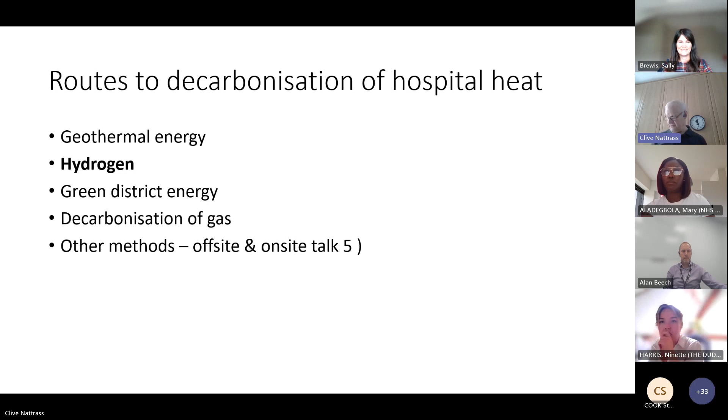So this is part of the program. There are several routes to net zero: geothermal energy, heat from earth, hydrogen, which you'll hear about in a minute, green district energy rather than not green district energy, and then some other technologies which we'll cover next week. So this one's the second hydrogen talk. First one was about Hynet itself. This one's more national.

So I'm going to first show you this map just to give you some background. The green bullseyes are sources of hydrogen on their way. Most of them aren't there now, but they're coming, sources of green hydrogen. You'll see them sprinkled around the country. So the northeast, Hull, Norwich, a little bit around London, not much. And the northwest, Hynet is there.

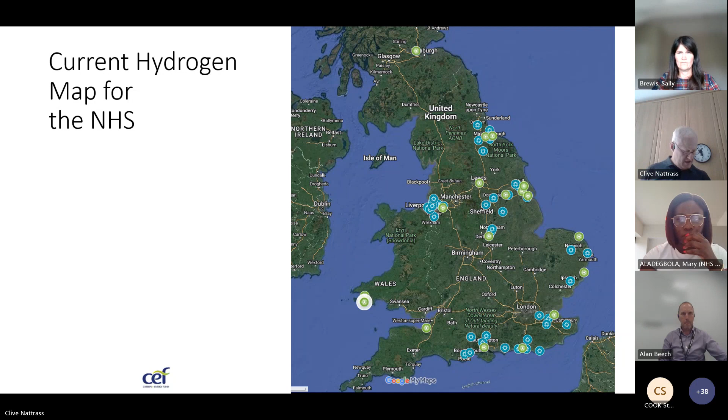And then the trusts that we've identified as being within the reach of hydrogen in the shorter term, maybe in the longer term everybody will get hydrogen, but in the shorter term, are the blue dots. So there is a lot of potential sites that could use this as part of their net zero plan. So I'll go on to Sally, who will talk you through the hydrogen piece.

Thanks very much, Clive. Just before I start, could we have a bit of audience participation, please? We've got 44 people in the call. Could you please raise your hand if you've not seen me talk about hydrogen before? Well, it's a scurrying of mice there, Sally. There you are. Keep going. Any more? It's quite important, just so I know where to pitch it. Sounds like around half of the people haven't heard from me before, so that's really helpful. Thank you very much. You can lower your hands again.

I'm Sally Brewis. I'm head of regional development at Cadent for the Eastern region and North London. We also cover the Northwest and the West Midlands. I'm going to talk to you about hydrogen for Cadent and our regional programme. So could we go to the next slide, please? We cover around 12 million supply points across the Northwest, the Midlands, the East of England and North London, 132,000 kilometres of pipeline.

And our ambition as Cadent is to repurpose our networks to hydrogen. We think that's the best option for green gas, and it can be made at scale in a low carbon way. So any hydrogen going into our repurposed network will be low carbon and subject to the government's low carbon hydrogen standard. The approach we're taking is to focus on industrial, commercial and public sector organisations first, while we await the decision from government on whether hydrogen will be used in our homes or not.

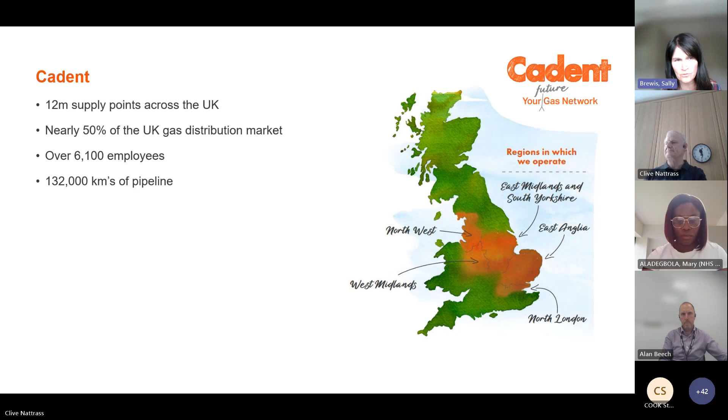Next slide, please. The government is very supportive of establishing a hydrogen economy in the UK. They see massive potential for economic growth through this new industry, and they want us to be a leader in the hydrogen economy. Consistently over the past few years, there have been lots of different strategy documents, all of which state hydrogen as having a role, in particular for heavy industry, heavy transport, flexible power generation, and also potentially for residential decarbonisation.

There are two things I want to highlight on this slide. I've already mentioned the low carbon hydrogen standard, which will mean that any hydrogen that goes into the network will be low carbon, whether it's made from electrolysis or from natural gas with carbon capture and storage.

But the other really important thing on this slide is about the hydrogen production business model. Just in the same way as for the last 14 years, government have been subsidising offshore wind to get that technology off the ground, to bring prices in generation from offshore wind down. They've used a contract for difference mechanism for offshore wind, and that is the mechanism that they are proposing to subsidise hydrogen. Cost of producing hydrogen is high now, but it will come down over time.

And what government wants to do is make sure that the price the end user pays for low carbon hydrogen is as close to natural gas as possible. So that production business model is very important when you're thinking about how much the hydrogen might cost your organisation in the future, if that's the route you choose to decarbonise. Next slide, please.

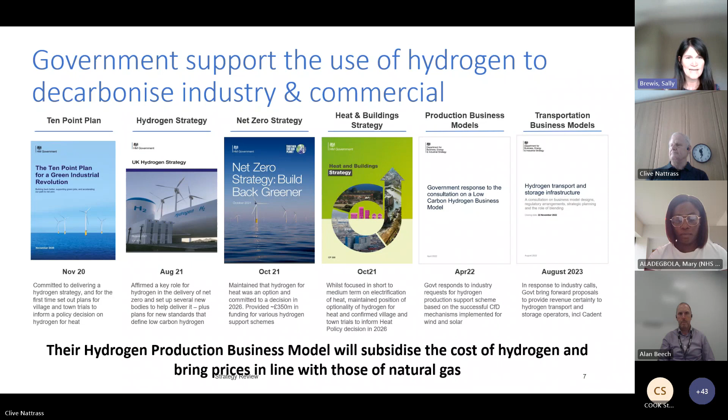So we've carved up our full network area into regional hydrogen schemes. So you may have heard about the Northwest programme and the talk that was done recently on that by my colleagues. But we have a regional programme for all of our network areas. So we've got East Coast Hydrogen covering the East Midlands and South Yorkshire, the Hydrogen Valley covering the West Midlands, and that stretch over towards Bacton in the east of England, which would be a major hydrogen production centre.

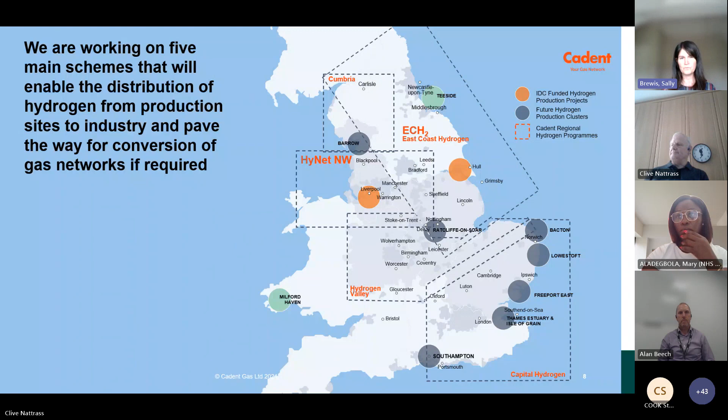And then you've got Capital Hydrogen covering the east of England and London. SGN cover the lower part of that patch, so South London and then the southeast. So we've got a programme for each region, and they're all at different stages. Move on to the next slide, please.

So we've discussed HyNet in the Northwest, which is our most advanced hydrogen programme. So that's approaching the DCO stage, where we get consent for this 125-kilometre pipeline, which is the initial stage of HyNet. Over in the East Midlands and South Yorkshire, the Humber will also be a major hydrogen production hub, and there's lots of heavy industry and commercial organisations that use lots of natural gas across this region.

And where you can see the blue line that goes down to Theddlethorpe, and then from the Humber across to South Yorkshire, and then south from there via Nottingham, Derby, Leicester, that is a new transmission pipeline that Cadent are intending to build in order to serve local industrial, commercial and NHS organisations in those regions.

The stage that we've reached with East Coast Hydrogen is that we're currently at pre-FEED, and what we've done is, working with Clive and Mary, we've included the NHS sites in South Yorkshire and East Midlands in our pipeline routing and sizing study, so that if trusts choose hydrogen as the route that they want to go, your capacity is included within our plans already.

But what we will need, and I'll come to talk about next steps later, is to engage more closely with you, any trust in that region, in order to look at your specific site requirements and understand, if you were transitioning to hydrogen, what your plans might be. So there is a next step, which is that we will need to start to engage with you if you think hydrogen is the option that you want to take and you're based in the East Midlands or South Yorkshire. Next slide, please.

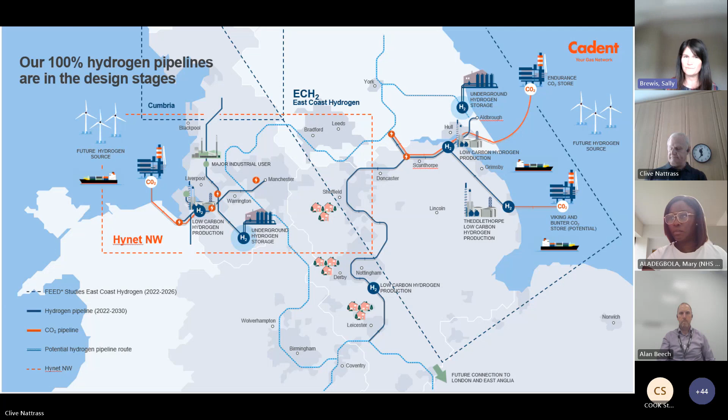So it's just to show really through this slide that our programmes are very much supported by industry, by producers, and to give you some confidence that these programmes are real. We have a lineup of hydrogen producers, which were alluded to right at the beginning. We have loads of industrial customers who've submitted forecasts just in the same way as we've received for the NHS sites in this region.

There is lots of support for these programmes, and that's very important because we need to demonstrate to government that these pipeline programmes are needed, so that we can get funded for the next stage. So East Coast Hydrogen, we're at the pre-FEED now, the pre-front-end engineering design. In early next year, we will submit what's called a reopener to Ofgem to request funding to move into that FEED stage, and having support from organisations in this way is very important to demonstrate that need is there.

So that's another reason why we need to start to talk to trusts in this region, if you think hydrogen is the option that you may take, or if you want to explore further. Next slide, please. Thank you.

So this slide is zooming in on part of the Capital Hydrogen region, which covers the east of England, London, and the southeast. Within this region, there is industry, but it's quite dispersed.

...which makes it more difficult to justify huge transmission pipelines in advance of that decision in 2026 on whether hydrogen will be used in our homes. So in this region in particular, we're focusing on hotspots for now until that decision in 2026, when everything might change. If government says hydrogen will be used in our homes, we'll be looking at how we can get hydrogen out from the production centre at Bacton in East Anglia to those towns across the east of England and then into London itself. So big change, big decision in 2026.

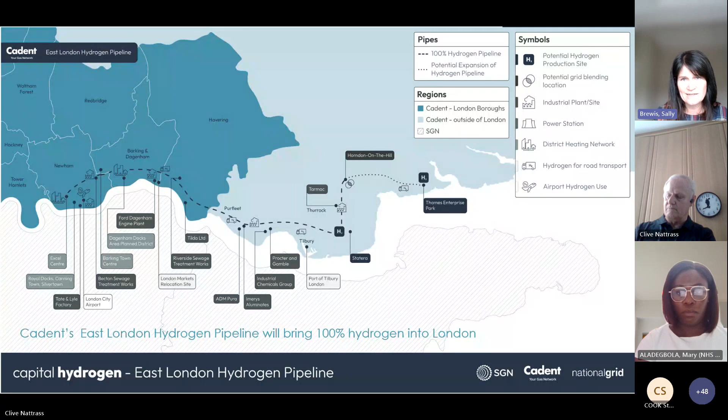Next slide, please. So that brings me on to the next steps. If you are in the East Coast Hydrogen region, so this is East Midlands and South Yorkshire, and you're interested to explore what that connection could look like in the East Midlands for your hospital site, then please do reach out through Mary and Clive. Be really pleased to talk to you.

And in other regions, such as in the West Midlands, East of England and North London, please do reach out in a similar way if you think that hydrogen could be important for your decarbonisation story, because we can look at what schemes we have, what hotspots we have close by, and whether to connect you to the range of producers that we're in contact with that could potentially create hydrogen close to your doorstep.

The other thing just to mention is that for East Coast Hydrogen, we have some major communication points coming up very soon. So we've got a particular focus on the East Midlands area at the moment, so Nottinghamshire, Derbyshire, northern part of Leicestershire. We've got a big event coming up on the 22nd of September at Toyota, and any local trusts would be very welcome to join us. We're talking about basically the really strong story that there is in the Nottinghamshire, Derbyshire and northern Leicestershire area. There's huge production potential. We're hoping for a big announcement from Uniper, and we can show just how strong the support is. We're inviting DESNZ, inviting Ofgem, demonstrating the real opportunity in that region.

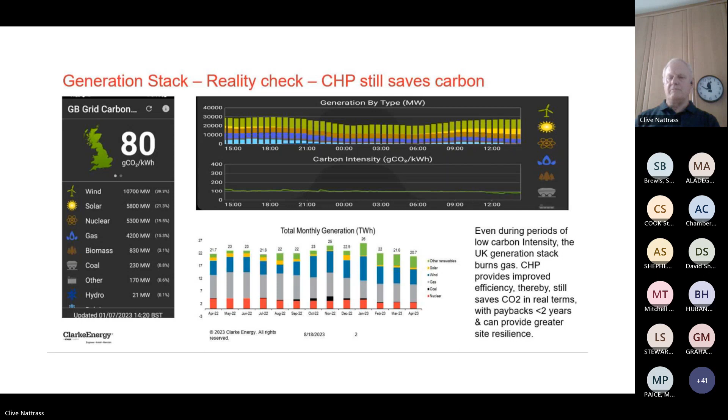So my point is, even during the transitional stage of a hydrogen economy, for the next 5 to 10 years, your CHP is actually saving CO2 compared to central gas power stations producing that energy. Next slide, please. Anyway, the point of today is, will it become a stranded asset when hydrogen becomes readily available? You'll be pleased to know, and as a business we're pleased to say, that no, it won't be.

We've been running on hydrogen for 20 plus years, up to 60%. It's a process gas from flare stacks we run on, so we're quite familiar with it. We know that all product lines we've been offering are okay up to 20%. We've tested up to 25% mixed hydrogen within the pipeline. And we also have a product portfolio available today to order that can run on 100% hydrogen, and that will be extended to other product lines as we go along.

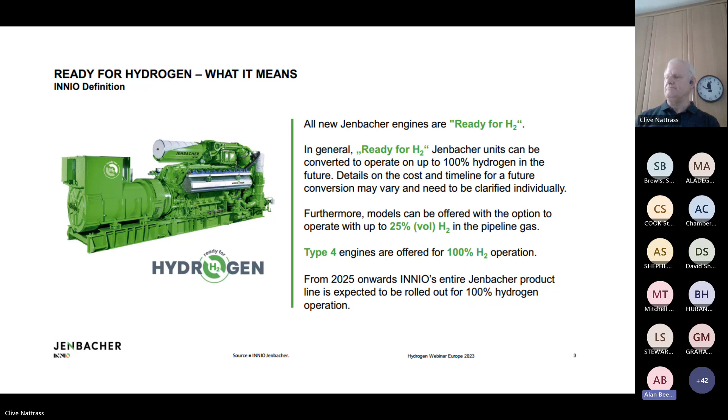Next slide, please, Clive. What we're seeing is that where gas is injected at transmission and distribution level, we see hydrogen from electrolyzer plants, green hydrogen, blue hydrogen with carbon capture, but we've also been seeing for a number of years, and increasingly today, renewable biomethane being injected into the mains gas. More commonly, that's having carbon capture at source, so depending on the feedstock, that too is carbon negative rather than carbon neutral.

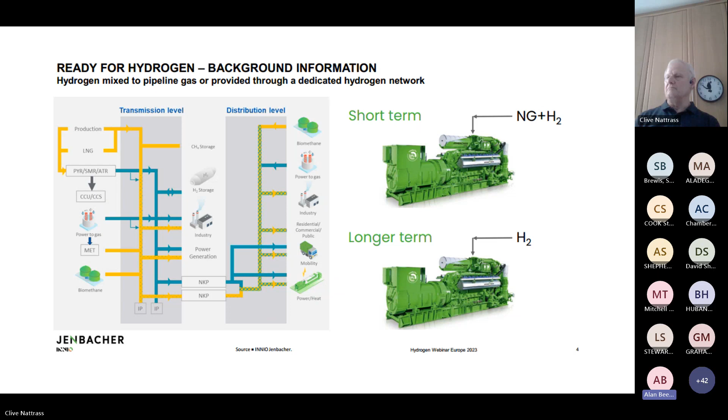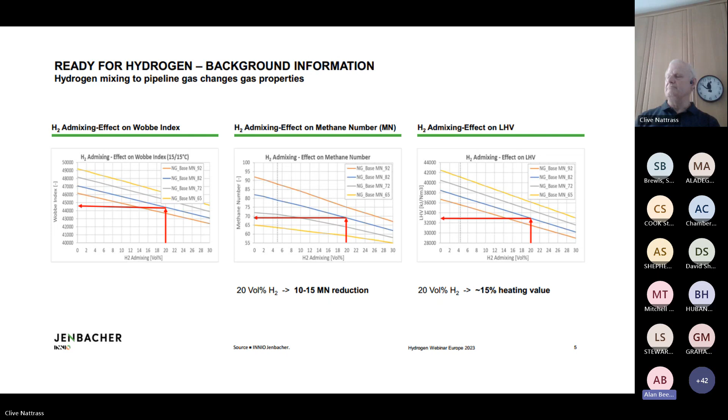Next slide, please, Clive. So here's some of the techie stuff. As we bring hydrogen into the mix, it affects the Wobbe index, the methane number, and the heating value of the gas. These slides will be circulated later, but this shows that you're going to have to put more gas into the cylinder to produce the same amount of power. Next slide, please.

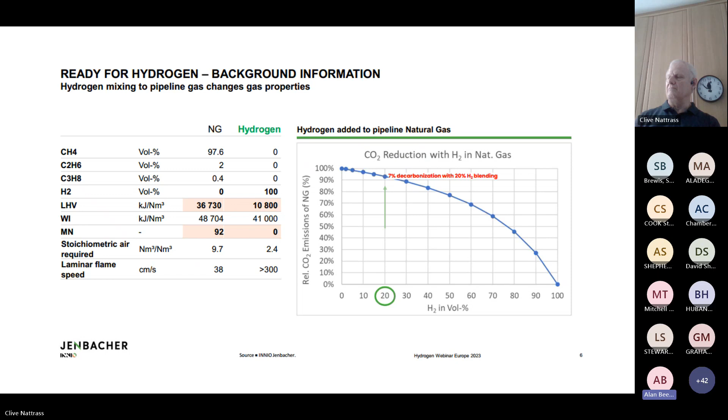This slide shows the benefit of CO2 reduction versus the amount of hydrogen gas going in. For 20% hydrogen mixed with mains gas, you're actually only getting a 7% reduction in carbon. That's because the molecule of hydrogen is 3 times smaller and has 3 times less heating value than CH4. So it's a little gain at that initial stage. Next slide, please, Clive.

Now, this shows where technically we're ready for each phase of the transition to the hydrogen economy. Currently we have anything up to 5% hydrogen in a gas line; the engine will deal with it, coming down the same pipe. Up to 25%, again, it's the same product with the same gas line going into the engine. But as you go above 25%, that brings certain technical difficulties, which other slides will show. And finally, we have the 100% hydrogen engine, and the next slides show the differences between type A and type C, type B being a hybrid of the two.

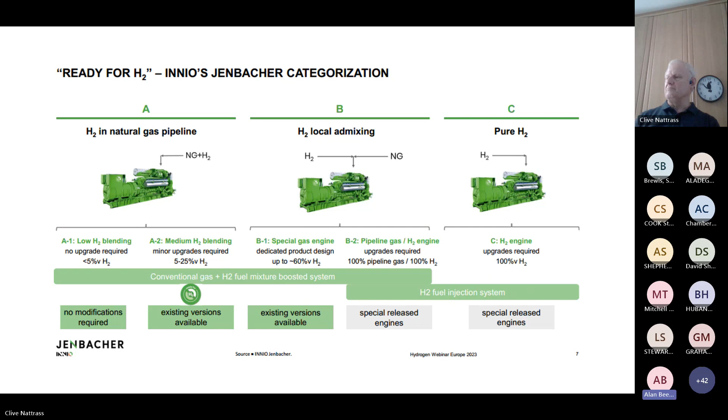Next slide, please, Clive. Now, this shows where we currently are with our product line. The type 4 is most prevalent in hospitals. In fact, I know there'll be a few on the call that have type 4 engines in their current fleet, Barnsley, Nottingham, and a few others that I managed to identify from a list of people who may be on the call today.

Now, currently Type 4 is available for 100% hydrogen release today. The Type 6 we're planning to have towards the end of next year for 2025 release, and so on for the smaller engines as well.

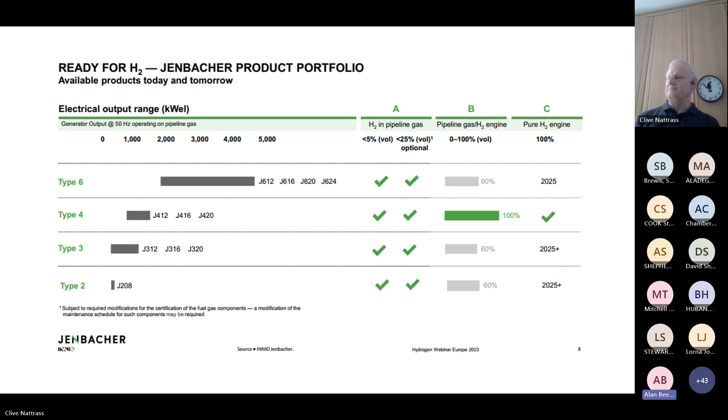So again, if you want to look at this slide, that shows you where we are from a power output standpoint, as to where we will be on the various grades of gas release.

Next slide please, Clive. Again, a bit of a techie one here. This shows you that once we go above 5%, because of the flame speed of hydrogen, it starts to produce certain problems within the combustion process. So we have a risk of knocking within the engine, which can put undue stress on the engine, and we can also throw NOx limits out of kilter. So it's something we have to deal with.

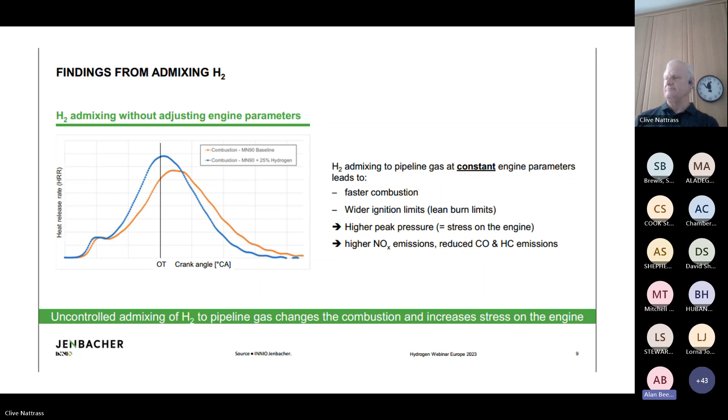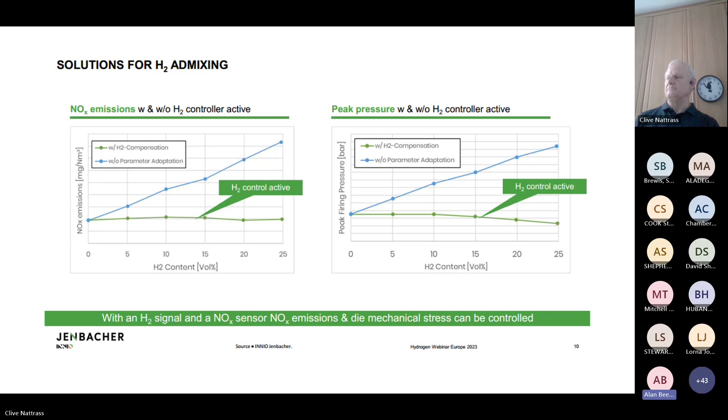If you go to the next slide please, Clive. So by monitoring the amount of hydrogen that's being mixed with the mains gas, we can control both the knocking, i.e. the peak pressure, and the NOx emissions back to current levels that are expected. And in fact, we can reduce the NOx levels below current engine capability.

Next slide please, Clive. This sort of physically shows you the difference between a Type A and a Type B and C. The one on the left is an engine that can take gas up to 20–25% hydrogen mixed. You see there's very little difference to an engine that you have today. All we need to do is monitor what percentage of hydrogen is coming in that gas line, and we can adjust the engine, and there's no derate on that engine whatsoever. An engine that's producing 1 megawatt or 1.5 megawatts today will pretty much run at that same electrical output.

But you will need to put more gas in there, as I've explained before, because of that molecule size of hydrogen. Now, as we see, you see the yellow pipe on the right-hand side there — this is where we've gone beyond 20%, up to 100% engine percent hydrogen. We now need to start bringing that gas in at higher pressures. We're talking about 8 to 10 bar now versus 150 to 250 millibar on the left-hand side engine.

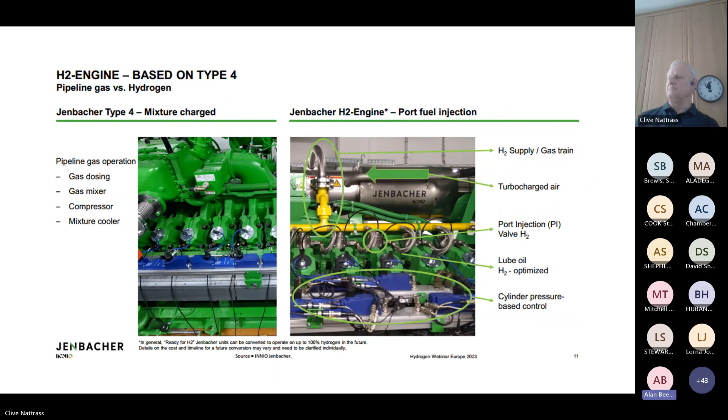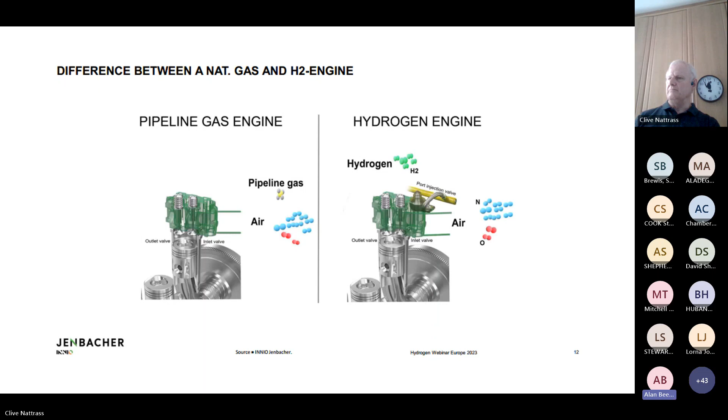Next slide please, Clive. So the main difference between the two engines is currently the gas and air is mixed before it goes to the turbocharger. Whereas with a hydrogen engine, once you've gone above the 25%, they don't meet until you're actually within the cylinder itself. So we're actually combusting the two and mixing the two within the cylinder.

Next slide please, Clive. Now this gets across a little bit of the derate. This is the Type 4 that we've released currently for 100% hydrogen. Looking on the right-hand side there, the 20-cylinder version is available on 100% hydrogen at just over 1 megawatt. Now, if that's on full methane today or mains gas, that would be a 1.5 megawatt engine. So we're currently seeing a 30% type derate by running on 100% hydrogen.

But the good news is, as we see more and more hydrogen becoming commercially available, because it's not there today, the R&D side, we know that by getting towards 2030, we can get back to the same output that we're seeing today on natural gas. So that 20-cylinder, we expect to be back up to 1.5 megawatts. And we also know, because we'll be delivering the hydrogen at much higher pressures, that we can get that mix in there, so we will be exceeding 1.5 megawatt beyond 2030 with 100% hydrogen.

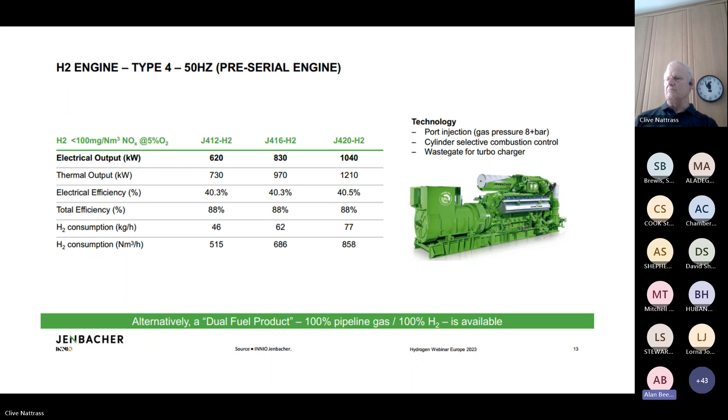Next slide please, Clive. Here's a business case — say we've been running on hydrogen for 20 plus years, but this is a project that will be commissioned this year. This is where we're putting 6 1-megawatt hydrogen engines into a data center in the Netherlands, that will have 30 to 1 hour storage on site to run all 6 engines on 100% hydrogen.

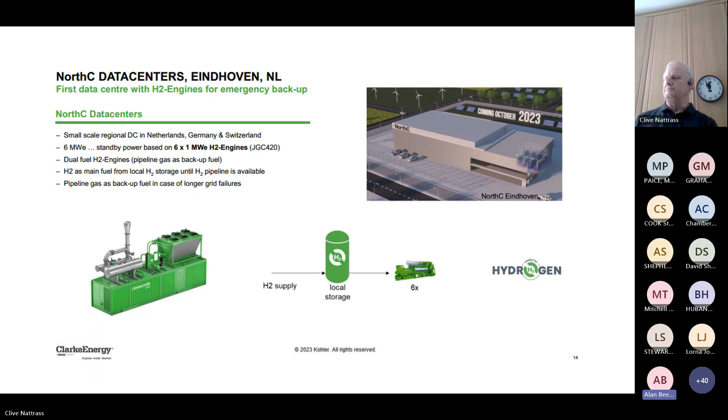Now, they calculate that 90% of their events don't go beyond that 30 minutes. So that will mean that they are 100% clean for any mains outage they have. But the engines are set up that if that event goes beyond the hydrogen storage on site, it will smoothly transit over to mains gas without a glitch. So whether you go in with 100% hydrogen with mains gas as backup, the technology is there to handle that. Next slide please, Clive.

We're not stopping at pure decarbonisation of the gas with CHP. We're looking at more CHP working with heat pumps, supplying heat pumps from the electricity, and also using heat lost from the second stage intercooler system. Previously that's gone straight into a cooler, but we're now feeding that into heat pumps, improving the coefficient of performance of a CHP from about 0.9 to 1.2 to 2 times that of a traditional CHP.

We've also got carbon capture within the exhaust gas systems. We've used that in greenhouses for many years, and in food and drinks industries for putting the bubbles in fizzy drinks, or the holes into crumpets. But we're also using it now to create commercial byproducts like precipitated calcium carbonate, used in paper manufacture, so that carbon can be used for additional revenue.

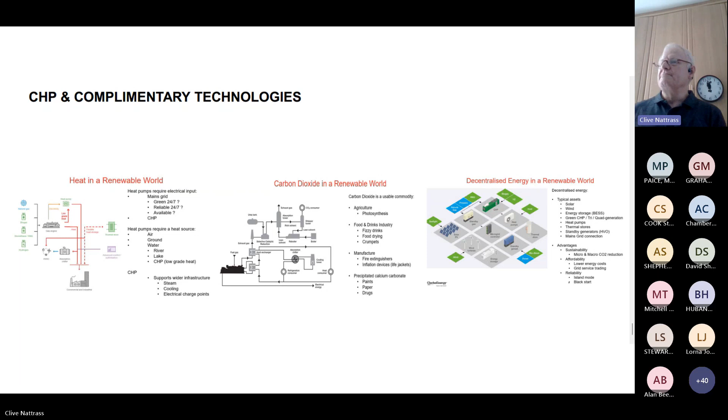There have been a lot of questions about when this is going to happen, so a few points I'd like to make. Hydrogen is going to be available over a lot of the country, but over a staggered period of time. We've concentrated on the hospitals that can get to net zero, the big emitters, and get to net zero by 2032, and we showed you those on the map earlier in the scheme.

If your invitation here said to save the date for your diary, then you were seen as a representative of one of those sites that can take hydrogen within that time period. If your invitation just invited you to the talk, then we haven't seen your site as one that can take hydrogen. So there's a clue as to how we've categorized you in your invitation, as there is for the geothermal and other routes to hydrogen.

A lot of things have got to go on to get hydrogen ready for you, and you heard that they're busy with pipes and all the rest of it, and that's great. But we can't just sit down and wait till hydrogen's there and then work, because we have to get our sites ready.

The nice thing about hydrogen is that you can keep steam. It's the only net zero technology where you can viably keep steam at the moment. So if you've got steam, a very good system, and don't want to go to low temperature, which is suitable for all the other technologies, then hydrogen better be one that you back. If you do need to de-steam, that gives you the choice of the different technologies.

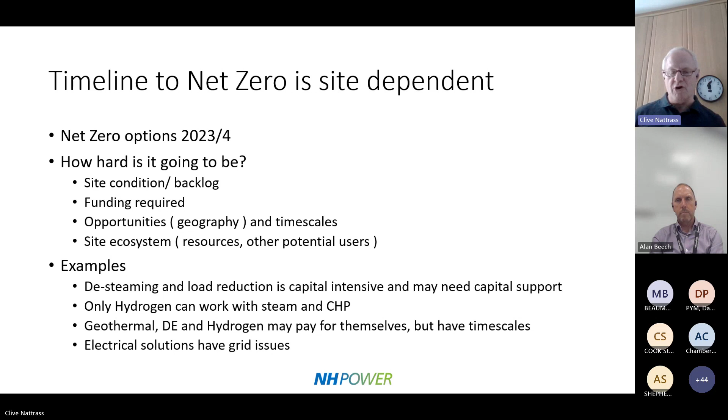And these are all parts of the streaming workshop exercise we're going to do at IHEEM, and that's where we're going to need you there.

So the support you're getting from the NH Power collaboration, which is all the people who've invited you today, is we put together these talks in August and September. This talk is recorded, will be on the website, and will be repeated in September. We'll learn from this, so it might get a little more content, who knows.

At IHEEM, we'll have workshops, we'll have as many of the contractors and suppliers as we can get there ready to talk to you. If you come armed to the workshop with your site needs and your site condition, then hopefully you will leave having attended a workshop with an idea about what kind of a mountain you need to climb in terms of timing and the rest of it.

And then in November/December, we'll have the roadshow, and we'll attempt to cost schemes for you. So you can walk away and say, right, I'm going hydrogen - what kind of investment am I going to talk about, and what kind of savings or revenue cost am I going to have coming out of that?

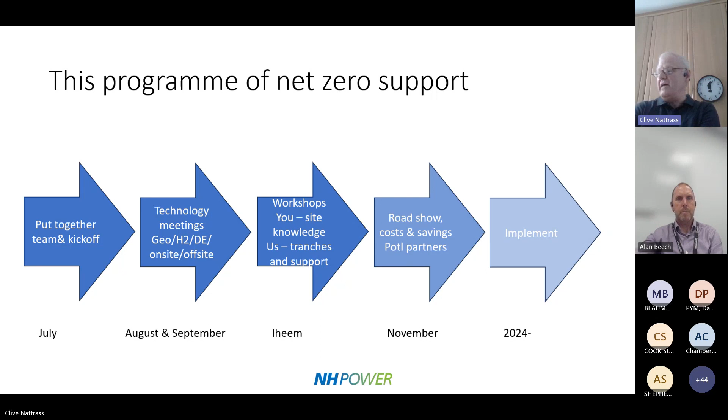So for your net zero plan, which you need to have ready for March, if you come as far with us to the workshops, you should be zooming in on the right net zero route. And if you attend the roadshow, you should get some costings to allow you to put them in your plan as well. And then the idea is that NH Power will continue to support you as best we can through the implementation phase that goes on.